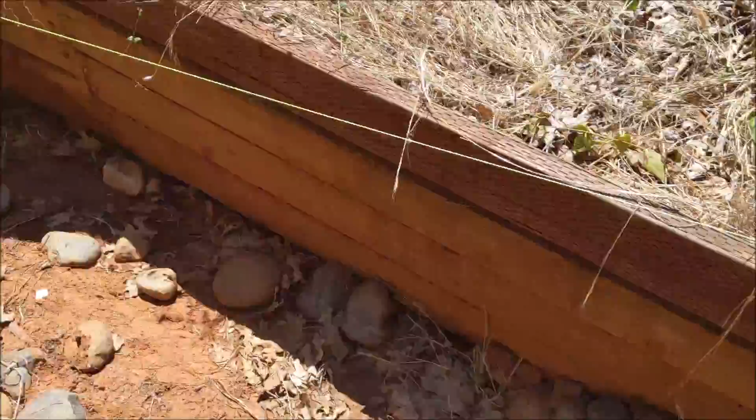Hey woodcutters, TopSaw here. In this video I'm building a deck, 20 by 10, wrapping it around the house, and I'm excavating all of that out. I have a lot of old students helping me out here. I'm going to run through design all the way to the finished product, keeping it under about 10 minutes with some time lapse, drone footage, and a voiceover for the whole thing. So it's going to be a big project I'm looking forward to.

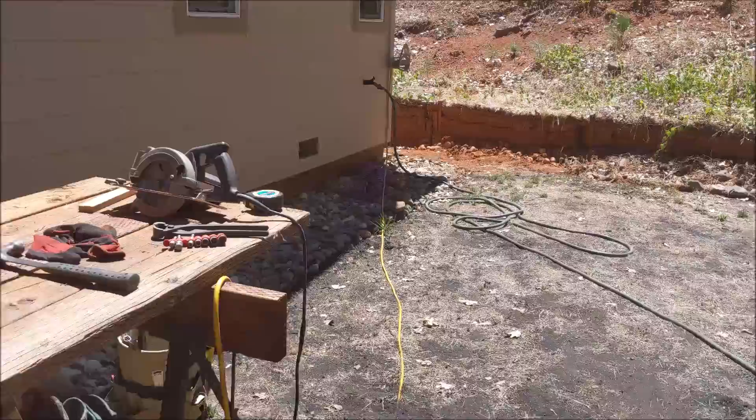To start this project, I get some tools out, build a temporary workbench, start getting the rocks and clutter out of the way, make sure I have power, and then start getting all my measurements, drawing it out on graph paper and writing down those measurements.

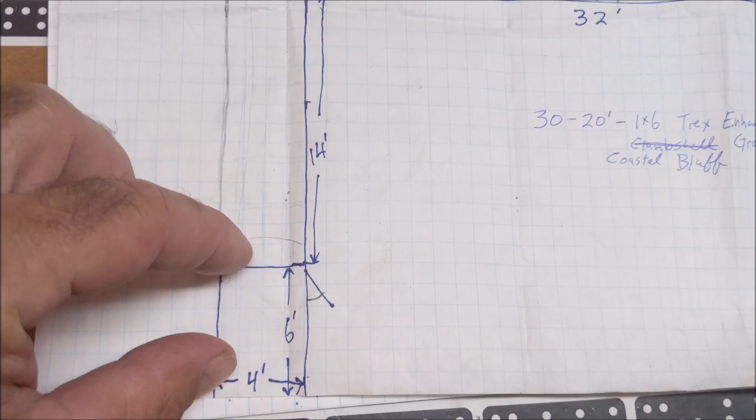I'm not quite to scale here. This is just my initial sketch and plan on what I'm trying to do, so I know a general direction to start with. This isn't my finished plan, just my initial sketches to get started.

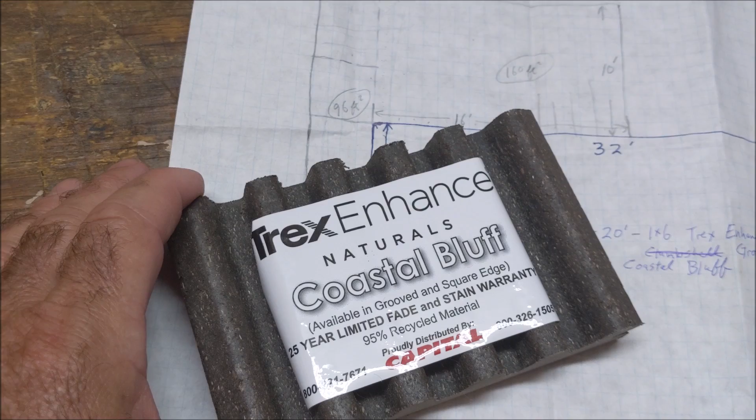After I have this, I go down to the lumber yard and price out all my materials. I figure out what materials will work best. I'm going to use this Trex Enhance with hidden screws so there are no screw holes in the top of the deck.

Now that I have my rough plan, materials, and site clear, I start drawing my actual plan. I have quite a few pages of notes, things I want to remember to do and include. I'm actually drawing out every board, every seam, and also putting together my materials list.

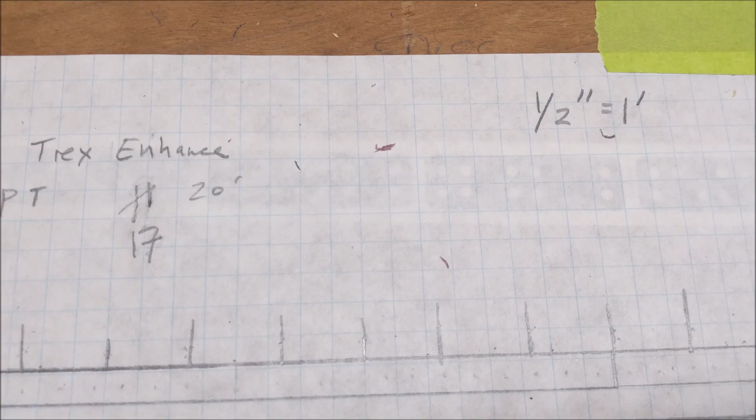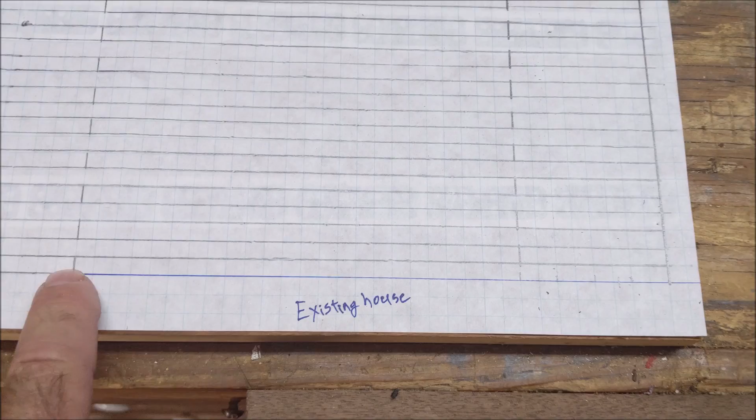This is actually a half inch to one foot scale, even though I'm on quarter inch graph paper. This way I can figure out where everything gets cut and what I need.

One thing I really love about this Woodpeckers rule is I use it like a drafting square. I put a piece of three quarter inch down on my desktop, and then I'm able to use that hook around the edge to stay parallel to the edge of the board.

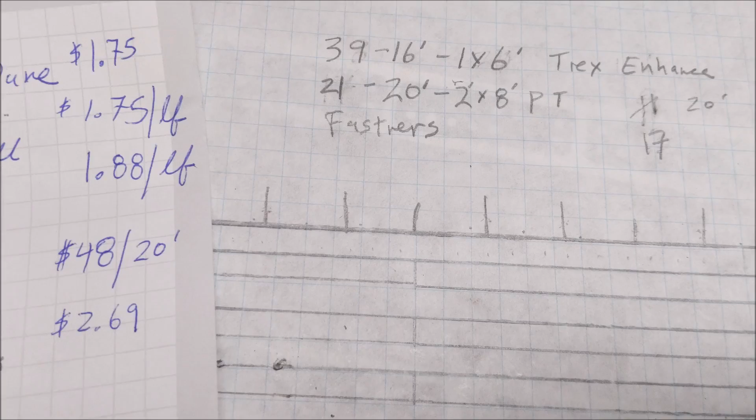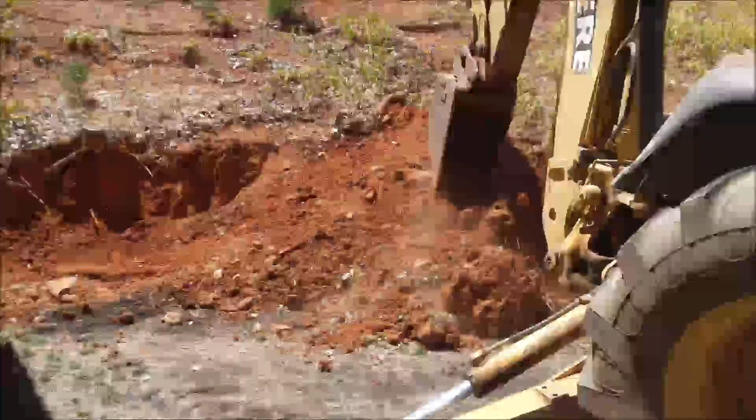I'm all done there, so I'm starting to gather my prices. From here I'm going to build a spreadsheet and try to put together a whole budget for what this project will cost. After my spreadsheet's built, I realize all that excavating is going to take a while to get those guys in.

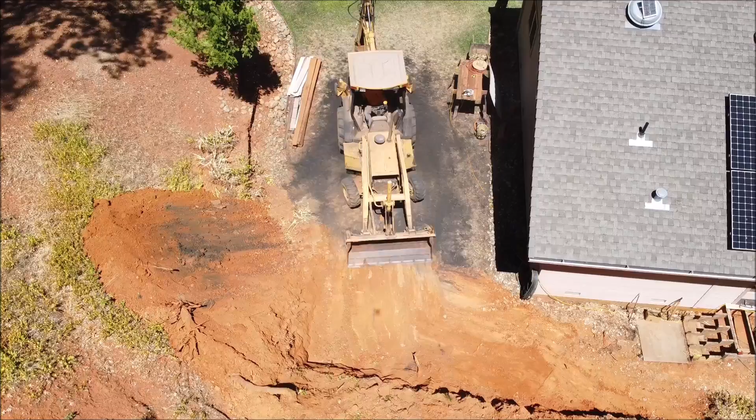So what I had to do is call a friend in, also an ex-student of mine, who's a contractor. He brought his backhoe in so I could get started right away, just doing enough for me to get started on the footings and the deck.

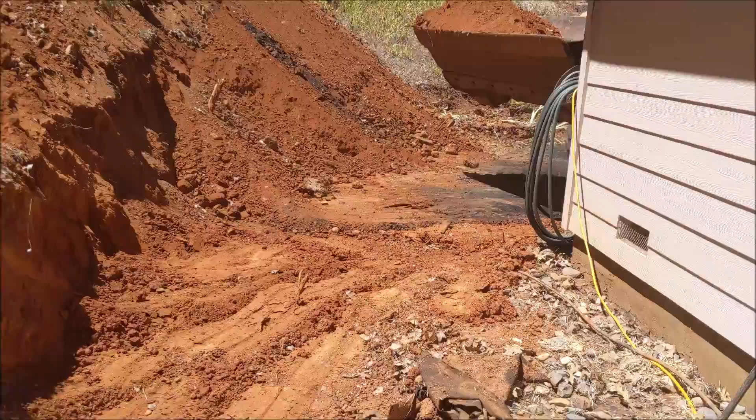There's a bit of a time crunch on this project. The mother-in-law comes in within a few weeks, so it has to be done by then.

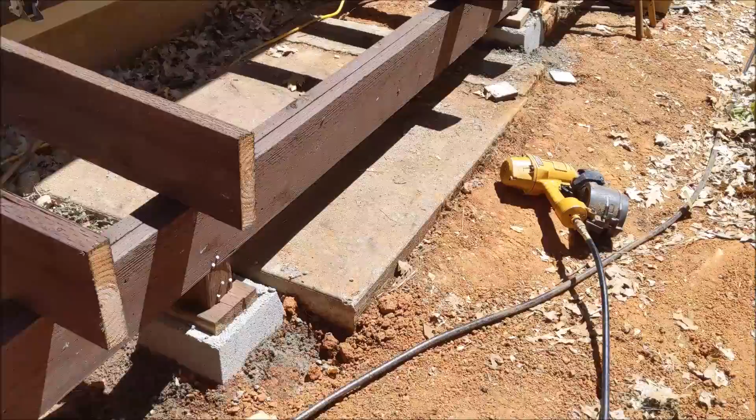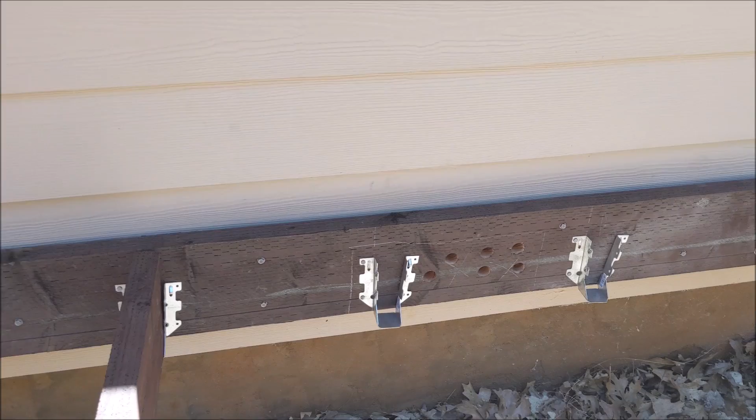The initial dirt is cleared so I could start framing. I tore off that old deck on the tie-in and put posts in. That's a ledger there with vent holes through it, and additionally on that ledger I have spacers between the ledger and the siding so I didn't have to tear off the siding. Those are joist hangers, my joist coming across to the beam.

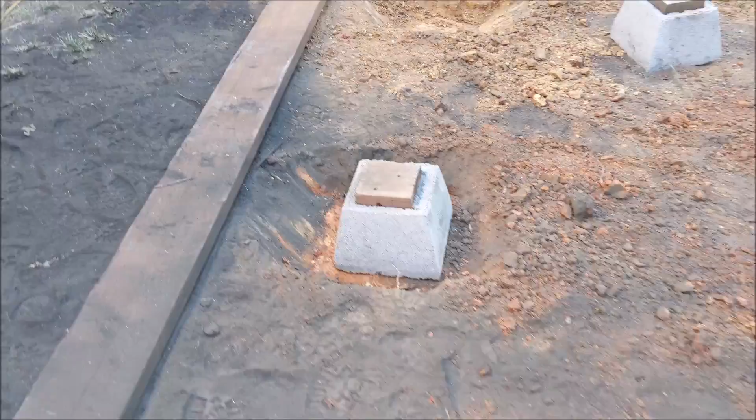And that's that little side deck, there it is right there. My joists are all in, I'm level with a little bit of grade away from the house, and then there's a 10 by 20 deck.

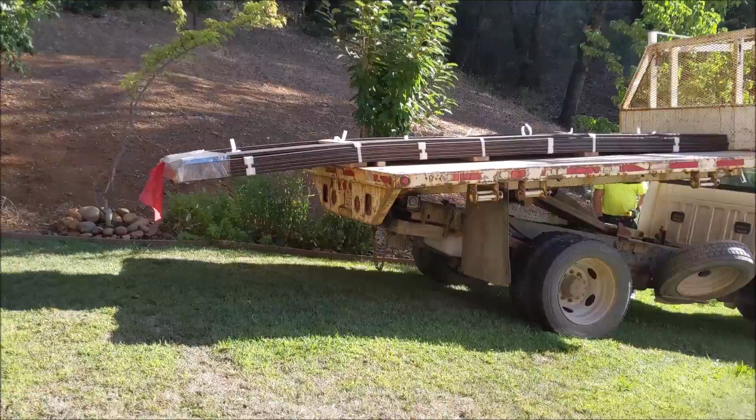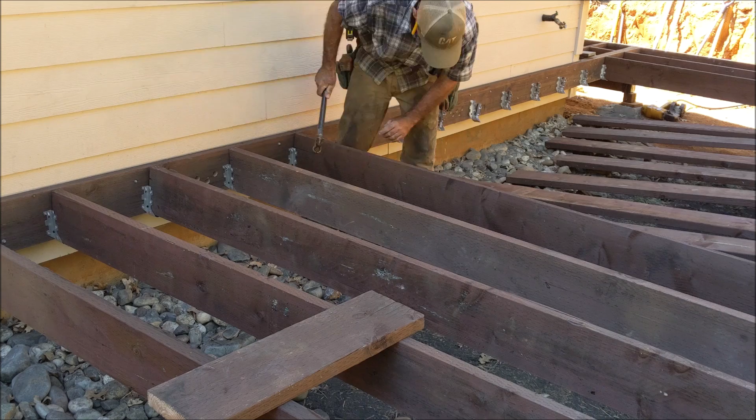As I'm working, the lumber company's coming over with 16-foot Trex, delivering it as close to the build site as possible. This is all pressure treated joist posts, and here I am attaching the joist to the joist hangers on the ledger. It's going pretty well, pretty quickly, mostly because the plans are pretty good.

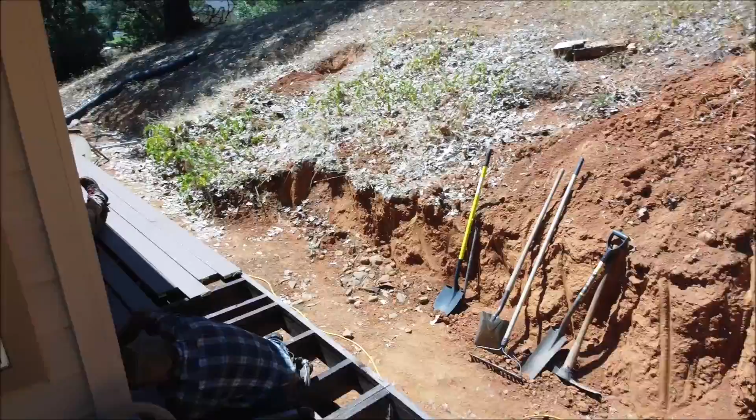So I got most of the deck done, and then the excavating crew came in. You can see the deck's pretty much done except for the decking not being laid. Now the excavating crew, owned and run by a student family, have come in, and they've been a giant asset. You can see them here.

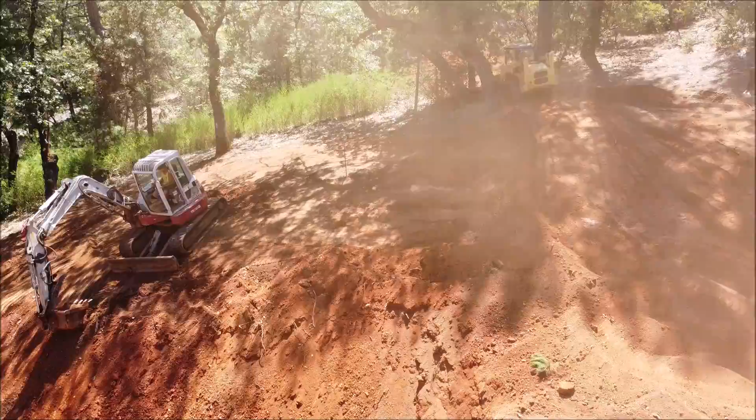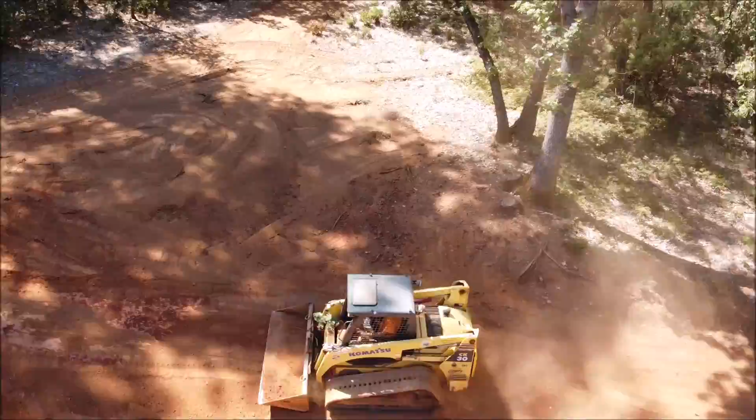They brought in an excavator on the weekend, a Takeuchi excavator, and then a skid steer to move the dirt. It's really a gigantic excavation project, and you can really pick up how skilled these old students of mine are, doing incredible work, especially with that excavator.

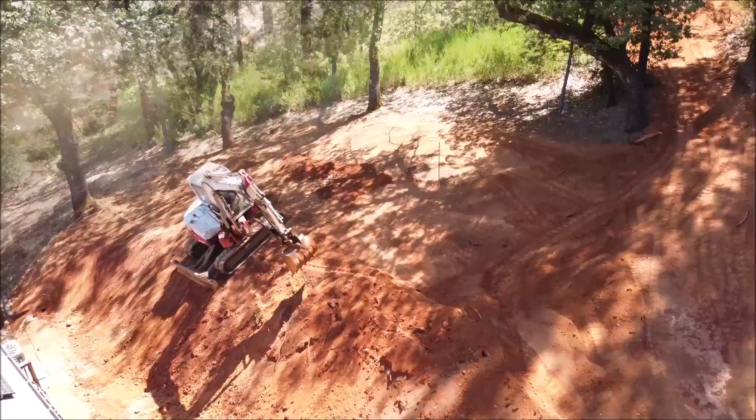It's a really steep slope and pretty scary excavating. So he's on the top, reaching down, pulling the dirt up and out, and then the skid steer is swinging back behind him, picking that dirt up and getting it out of the way. Shot from the drone right here.

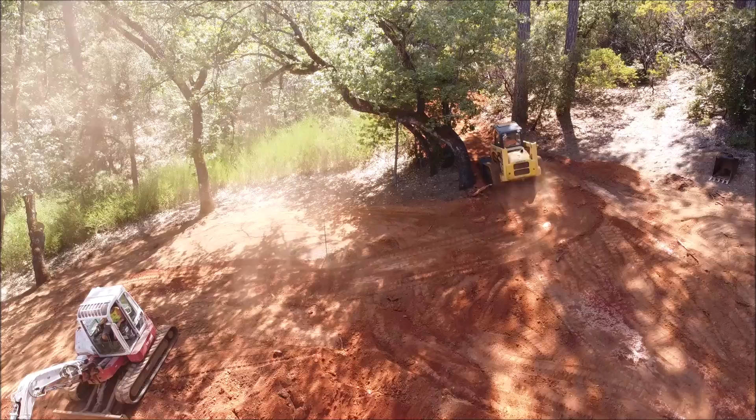We're actually doing pretty well on the time frame and on the budget so far, mostly because the plans were pretty well set before I got started, and my spreadsheet of materials and costs was all pretty well set.

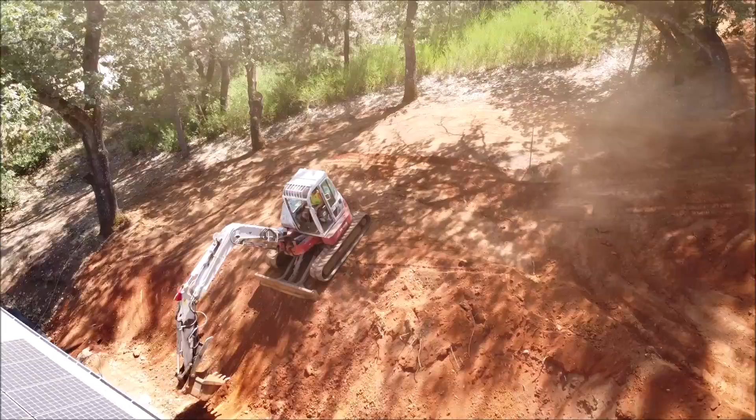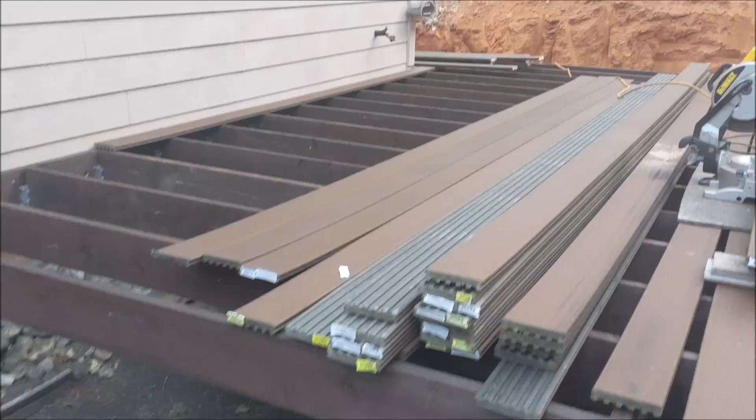There's a skid steer just taking it away, sweeping the dirt under the carpet, so to speak, and there's the excavator pulling it out. While they're doing that, I'm starting to lay the decking down on the joists. I always like a nice place to work, so I got a few decking boards down to set up the miter saw.

You can see the deck's pretty much done. Just need the decking on it, the rails, and a few more other bits and pieces.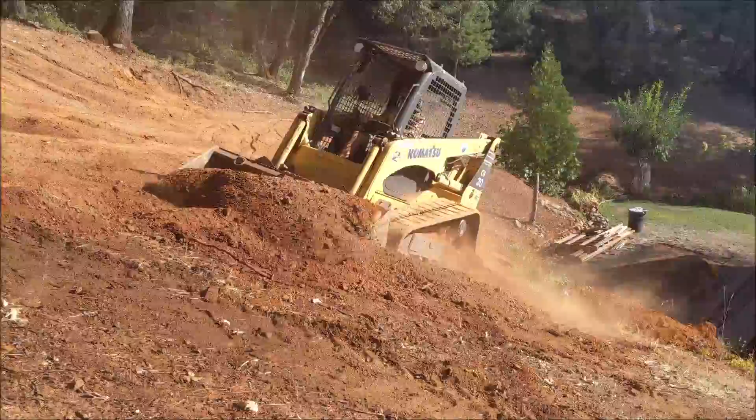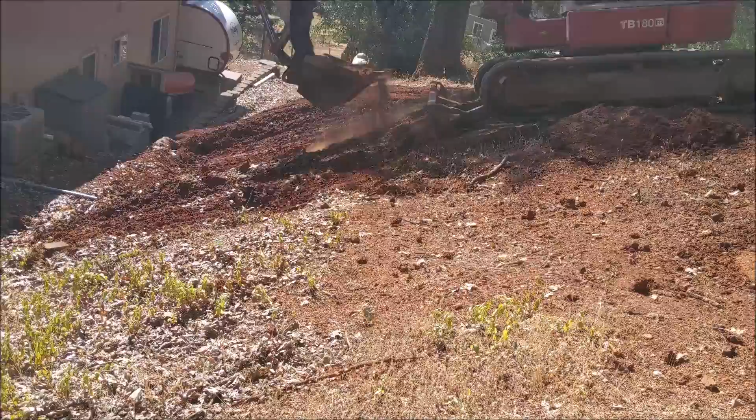It's really a ton of dirt to get moved, but they're doing an incredible job with that skid steer. Really steep slopes, water's on there to hold the dust down, and also to keep the dirt packed a little tighter.

On that excavator right there, you can see how high up he is and how far he has to reach down. Maybe one of the most important things on a project like this is drainage.

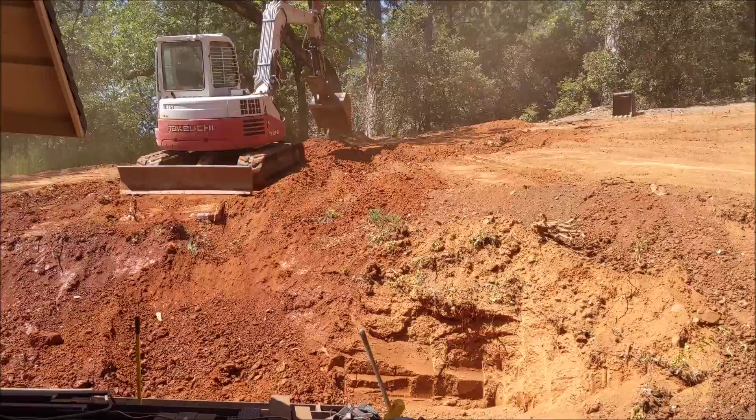I want to make sure that by the edge of the deck to the bottom of the bank, there's at least 6-7 feet, so that in the future I could get a mini skid steer in there to clean it out if I had to.

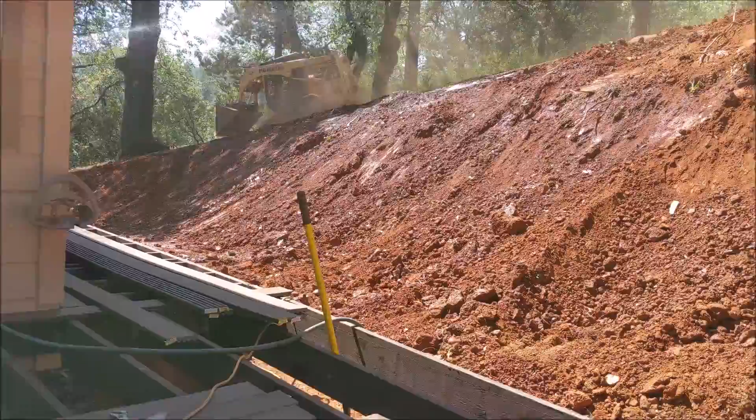Also, when they're all done digging out the bank, the skid steer could come down here and get a nice good grade and flat edge. It all slopes back there, and then I have a 6-inch pipe in there for drainage.

This is the dirt getting swept under the carpet here. It's just getting pushed out over, kind of over the rise there, just out of the way. There's a culvert draining it, and there's the slope.

Now here's a mini skid steer coming down the steep bank. This is a little scary right here because the dirt's so loose. He's trying to slide it down here.

To get it down to kind of screed the whole bottom so it has a nice flat surface and also a nice grade on it right here.

It might not look that steep on camera, but it's steep right there and soft. And there he is, kind of skating it down. Then, now that it's down, he'll be able to pick up all the loose dirt at the bottom of the excavating site.

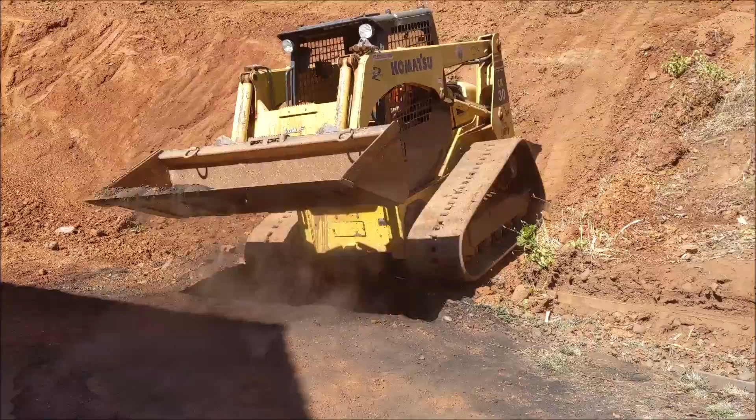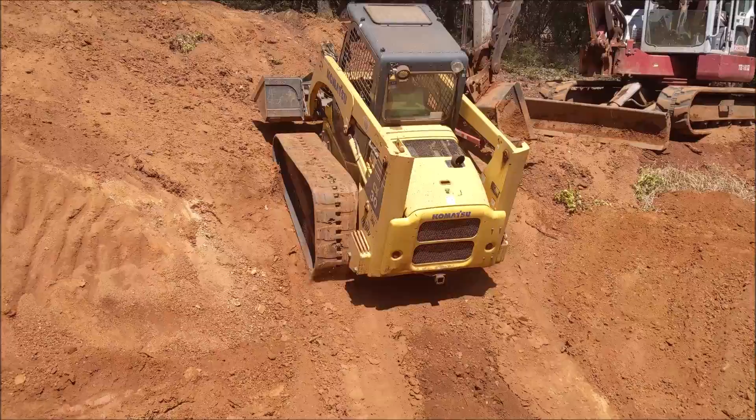And then, after he has that all nicely leveled, this is some funny video of him trying to get up out of there, trying to drive it straight up, too steep, too soft.

The excavator right there is trying to reach out and give him a hand up, or I guess a bucket up, trying to grab the bucket and catch it and pull the skid steer up, but the soil's just too loose. I'm glad it's not me slipping and sliding.

That stuff always makes me super nervous. And then here he is, a little bit of an angle, just about losing it.

Sliding back down. There he goes, one more try. Just got it, just about has it. There it is, up over the edge. Keep that inertia going, spins it, and got it back up that bank after it got all nicely cleaned up.

Really unbelievable skills on these two pieces of equipment. Nothing makes me happier than having an old student come back with just so many skills and help me out. Just fantastic to see. So there it is, all excavated out.

You can see the deck, beautiful dirt work, but as every project, there's always glitches and problems. Right here, the track had just come off the excavator, but they're getting it figured out and it's getting done. That's the key thing, done and done well.

There's the deck, all the decking laid down, looking pretty good. Needs to get trimmed off and rails put in.

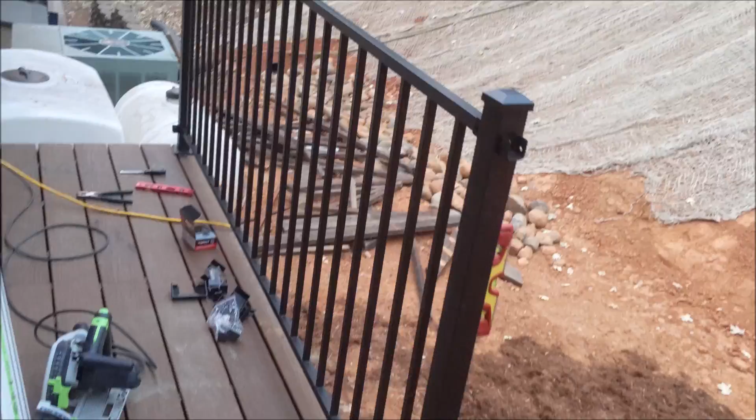And then here's the first powder-coated steel rail from Hills Flat. I like this stuff a lot, works really well, looks good, nice and solid, easy to put in, with blocking underneath it to support it. And then here, you could see one of the panels right here.

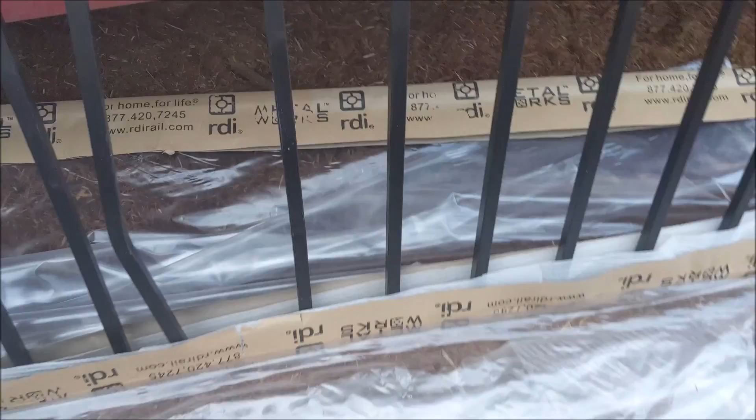It was wrapped in saran wrap, but got smashed at Home Depot or wherever it came from. This always drives me crazy. I'm trying to get the job done, staying up late at night to button it up, and just about got it done right here, just in time.

There's a trailer in place. Grandma's ready to move in. And there it is, access to the house, flat deck in your own private place.